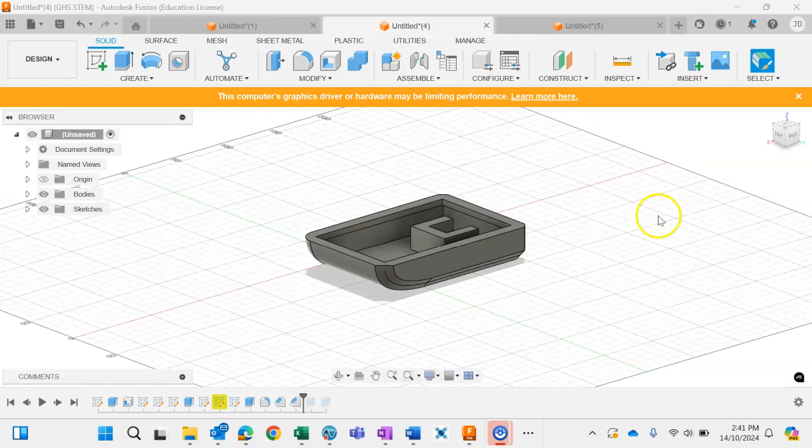Hi, in this video I'm going to show you how to create a simple flat bottom boat, kind of like what you can see up here on the screen at the moment. If you haven't already watched my video on how to create a pontoon boat, you might like to go back and view that for some other design principles I'll probably skip over here. I'm going to create a new design. Like with the pontoon boat, we're looking to create a two-dimensional cross-section of the boat, then use a process called extruding to turn that into a 3D shape.

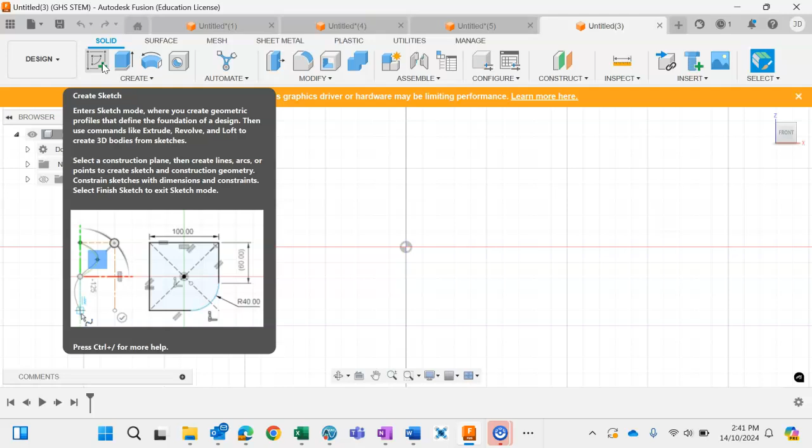So I'm going to go to the front view. Now I'm looking at the red line there, the x-axis, that's like our print bed. The z-axis gives the depth or the height of the object. Like I always do when creating a new sketch or product, we need to create a new sketch, and then create a two-dimensional representation of what we want to build.

You might have just missed that step, I just skipped over it. I clicked on that square there, so I've told Fusion 360 that I'm working in this plane.

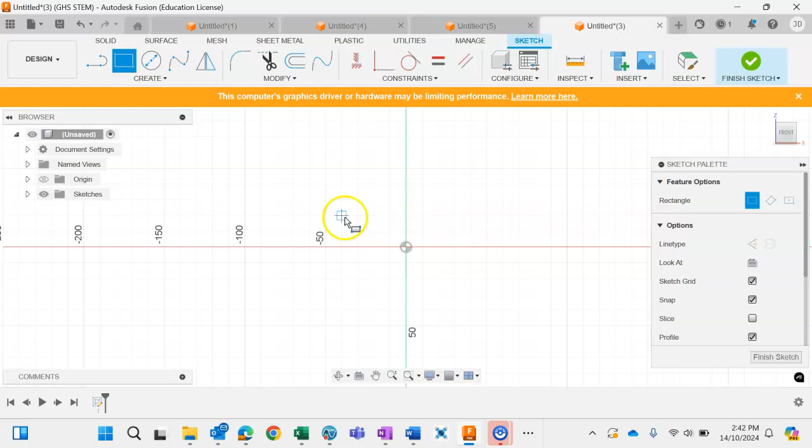Now I'm just going to create a big rectangle basically. Remember the dimensions of the boat are 150 millimeters by 100 millimeters, so I'm going to stick to those measurements. Of course, you could make it smaller if you wanted to - that's the maximum. How deep you want your boat to be is up to you, but I'm going with a height or depth of 30 mil.

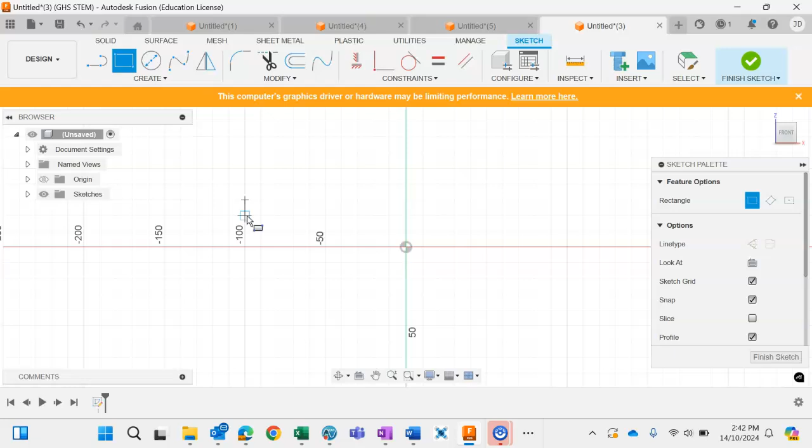I'm just going to click in that top corner there, and then drag out my rectangle, taking it into the middle so that's 100 millimeters. Because when I add on the next bit, that's going to make it 150 mil. So the next thing I want to do is create a curved line.

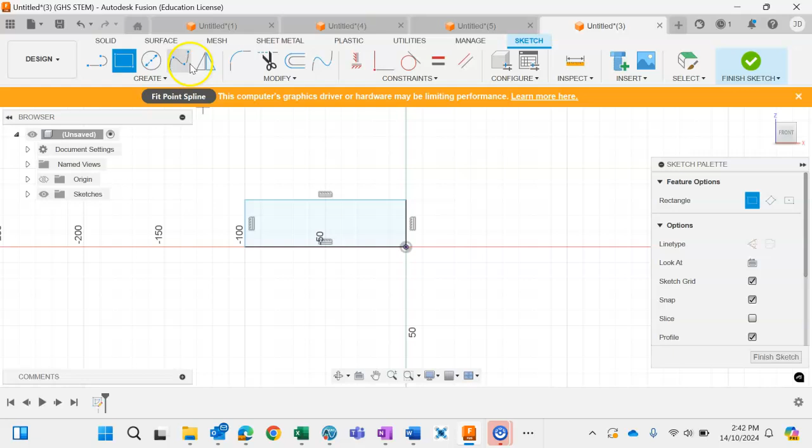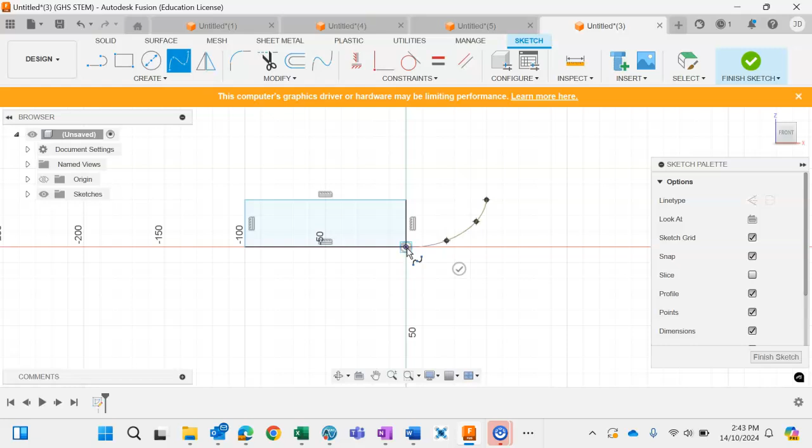I use this function up the top here, it's called fit point spline. I'm going to grab that and take it out to 150 millimeters from the back of the boat. With this tool I can click a few points, and then press enter once I've clicked on my last point. And then I've got a nice curved line.

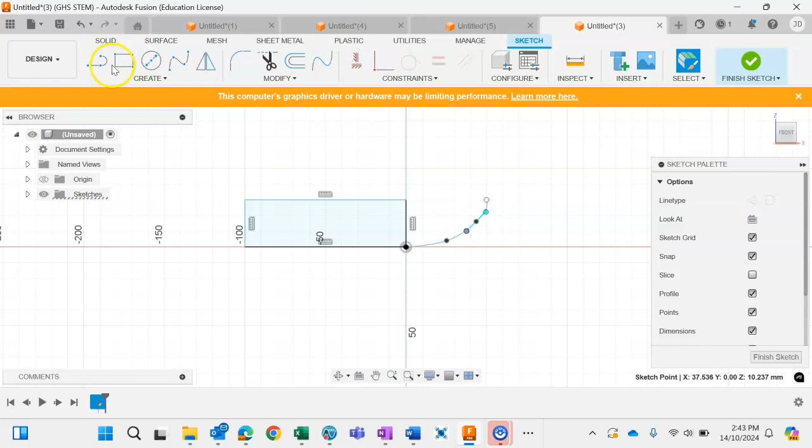Now these green dots we can use to drag the shape around to create different angles, so you can use those to adjust the pitch of the front of your boat. Then I'm going to join the rectangle up with that curved part, so now I've got a total length of 150 millimeters, and a two-dimensional representation of what my boat's going to look like - a cross-section of it.

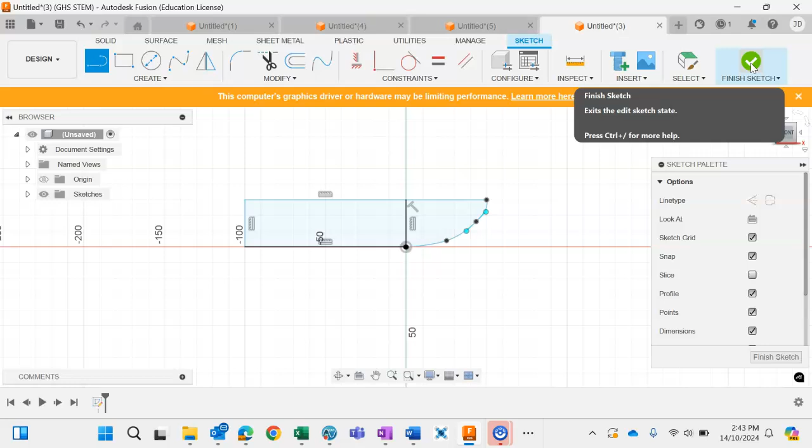Now I'm just going to click Finish Sketch because I'm done working in 2 dimensions. I want to turn it into a 3-dimensional object. So I finish my sketch, and then go to the home view, so I'm looking at it in 3D.

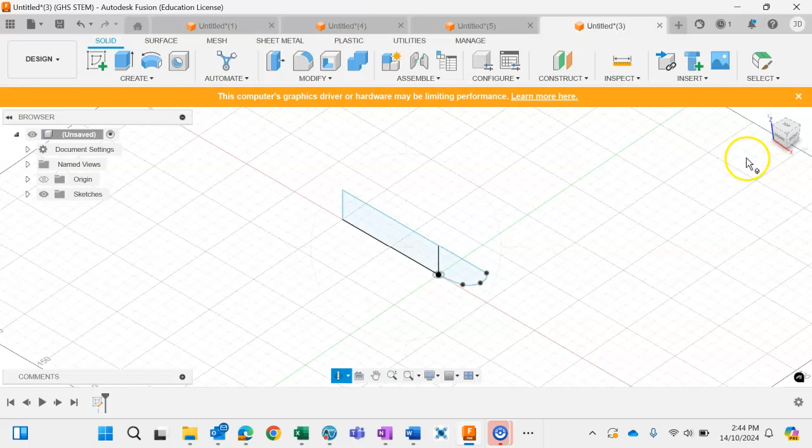Now I'm using a mouse, which makes it really easy. I'm using the scrolling wheel to zoom in and out of that design space. If I click on the scrolling wheel, that allows me to pan - you can also pan by clicking on that pan option down the bottom if you're using a trackpad. If you want to orbit, to look at it from different angles, you can choose that orbit option, or use the orientation cube to orbit around or change viewing angles.

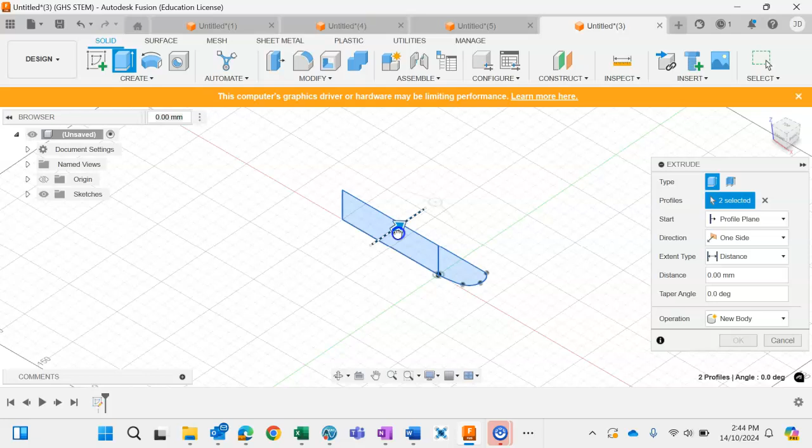Once I'm done with the orbit, I'm going to click escape, which gives me my pointer back. I'm going to use my window selection to highlight the shape I've created so far, and then choose the option of extruding it. Now I can just drag that over, or type in 100 mil because that's the width of our boat. Just enter, and there you go - you can see straight away I've got a really simple flat bottom boat there.

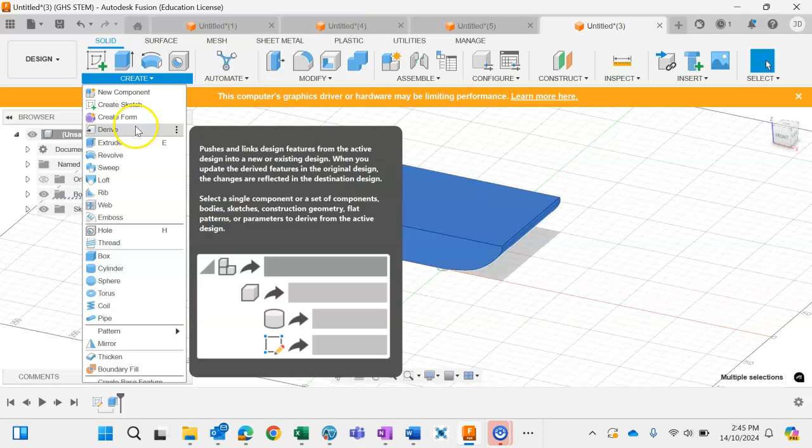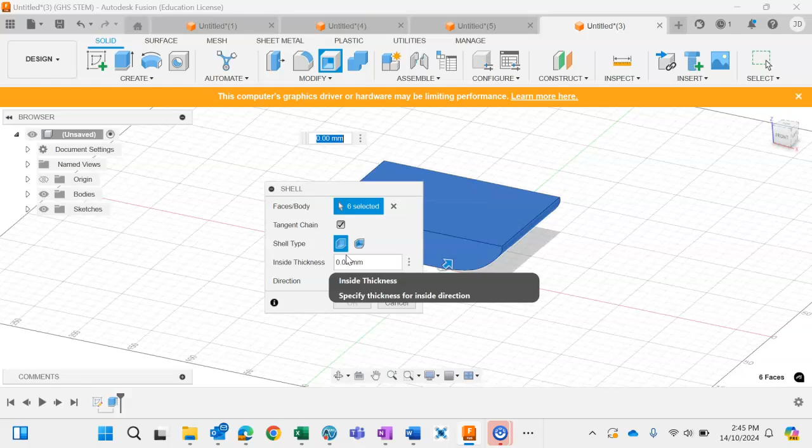Now you might have noticed in the other design I created, it was an empty hull, so it didn't have a top to it. The way we do that is if I highlight my object again, then go to the create menu... sorry, in the modify option, I'm looking for the shell. When I click on that, I create a shell and decide what thickness I want. I'm just going to give the shell a thickness of 3 millimeters.

Okay, and then I'm just going to click OK. Now it looks like nothing has happened at this point, but what it's done is it's created the inside of this object as basically empty. So I've just got a shell there, nothing on the inside of it.

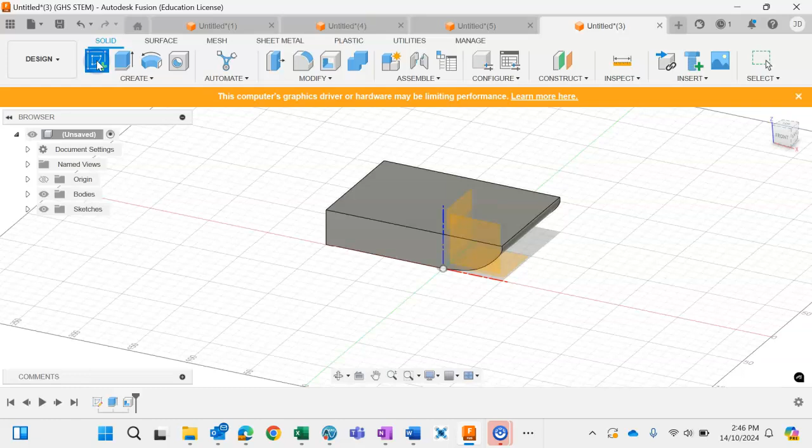So what I'm going to do now is remove some of the top so that I can see inside my boat. I'm going to click on create a new sketch, and click on the top surface, so now I'm looking down on my boat. And what I'm going to do is create a rectangle on top of the boat.

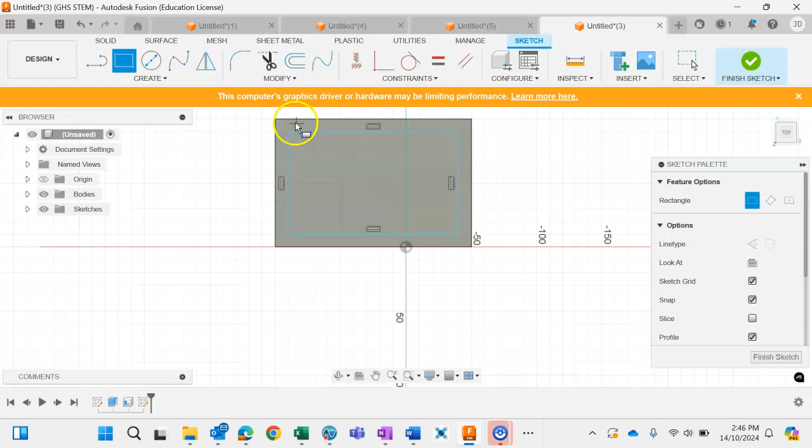I've made my rectangle so it's got a pretty big width of 10 mil. Now if I go to finish sketch, I'm going to click on that face, and now I'm going to extrude. I'm going to give it a negative extrusion of 5 millimeters - I think 3 would do the trick, but I'll go with 5. Sorry, I need to go -5 because I'm going downwards.

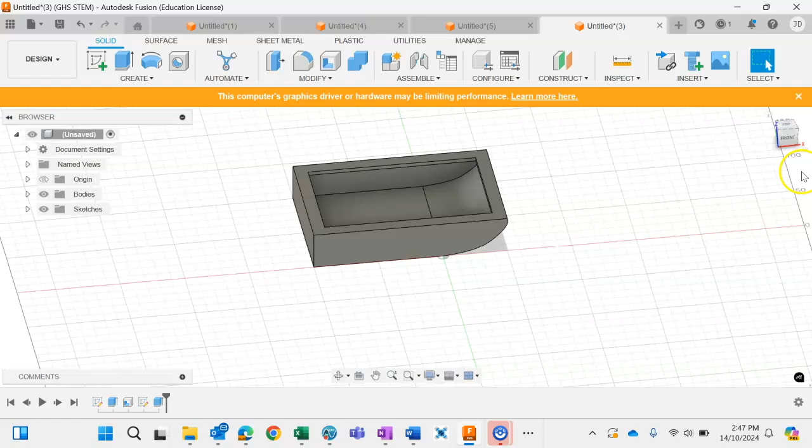Okay, you can see once I've done that, I can now see inside my boat, an empty shell. So then if you wanted to, you could go ahead and mount your motor in there, or set up a place to put your sail, or whatever it is you're using as your mode of propulsion. Now if you're using an electric motor, for example, you'd need a hole at the back of your boat for the prop shaft to go through.

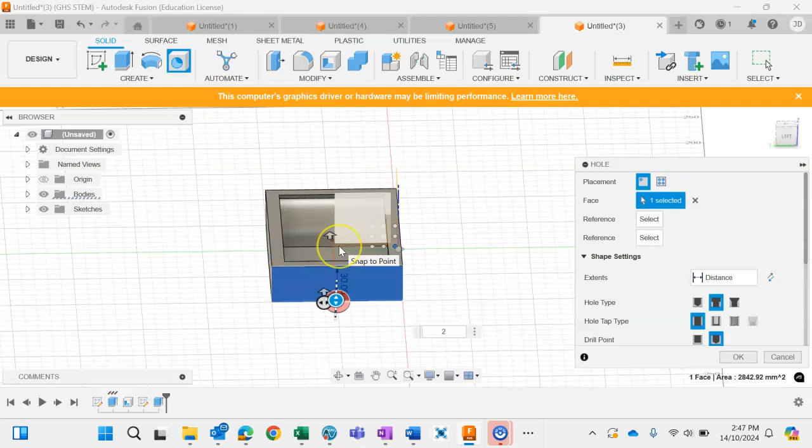Now this is something we can always do with a drill later on, but I messed that up, I didn't want to do that. So I'm just going to go back. I don't actually want to use that hole. Sometimes it's easier, I think, with a hole just to use a circle.

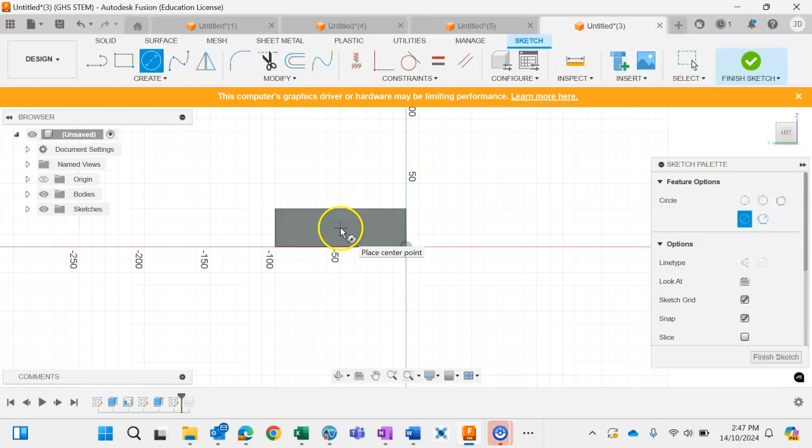So I've just clicked to start a new sketch, just going to create a circle. I'm going to put it around about there, and I might make it like 3 millimeters. Might be enough, maybe 5. 5 might do the trick. Okay, and then I'm just going to finish that sketch.

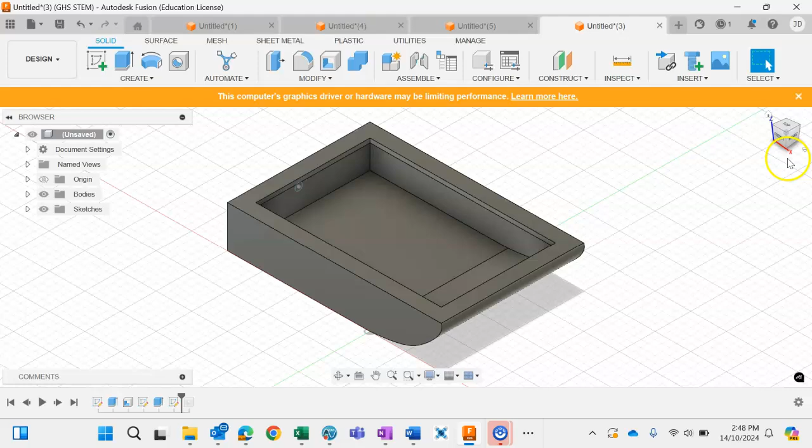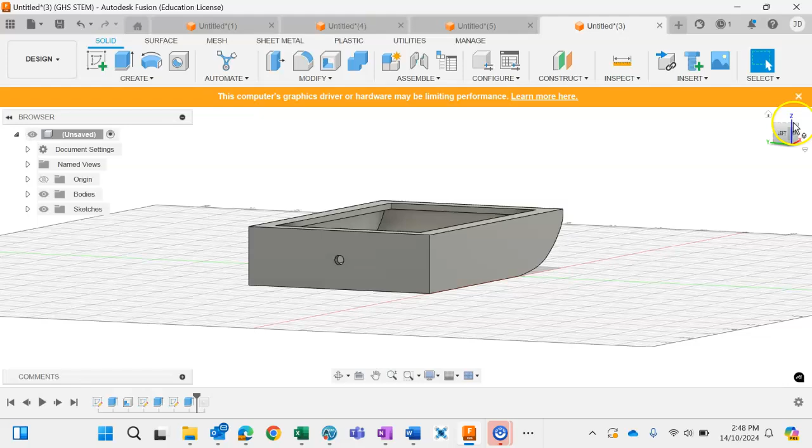And if I go back to that view and scroll around so I can see that hole, I'm going to click on that circle, and then extrude it. Click on that again, so I'm just going to go -3, and that will make sure the hole goes all the way through. That's somewhere you could put the prop shaft through, from your electric motor through to the propeller. Then it's sort of like we did with the pontoon boat.

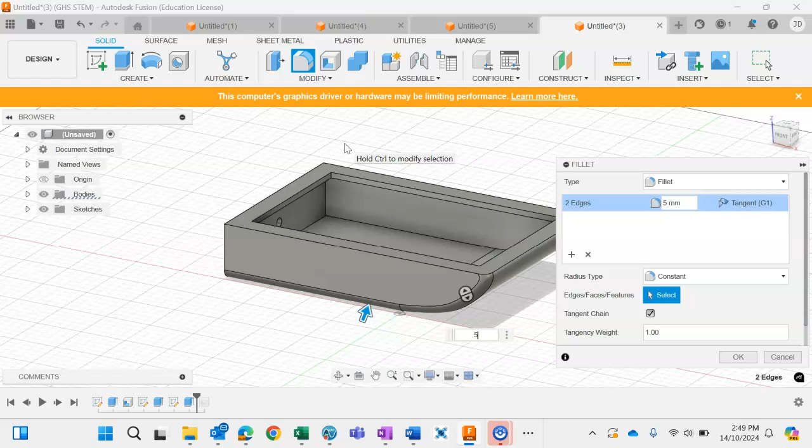You can then use fillets and chamfers to make the shape a little bit neater. So I'm just going to click on that edge, for example, and control click on that second edge, and then choose from my modify option whether I want to fillet or chamfer. I'm going to show you the fillet first, and I might make that 3 mil, maybe 5. And then you can see we've got a nice rounded edge on that side.

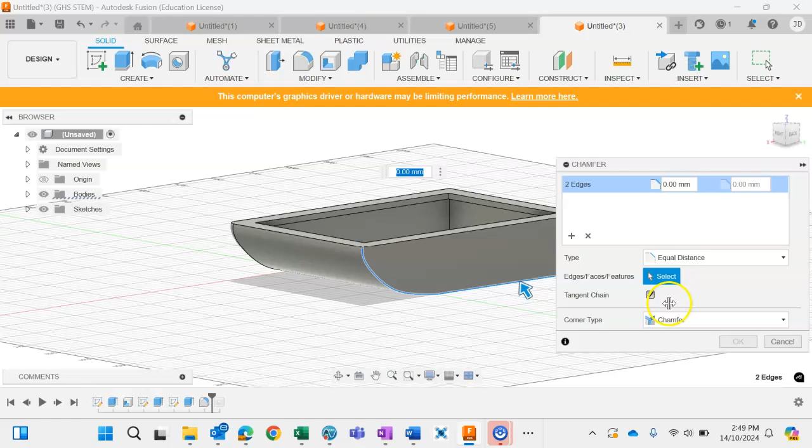Just to show you the difference, I'll go over to the other side and do a chamfer. So I've clicked on that and control clicked the other edge, then we'll go for a chamfer. I might try and make that 5 mil as well. Press OK. And then you can see I've got a nice 45-degree angle on that side. So you can decide for yourself what type of finish you'd like - you might even just leave it square, and that's fine as well, but there are some other options for you.

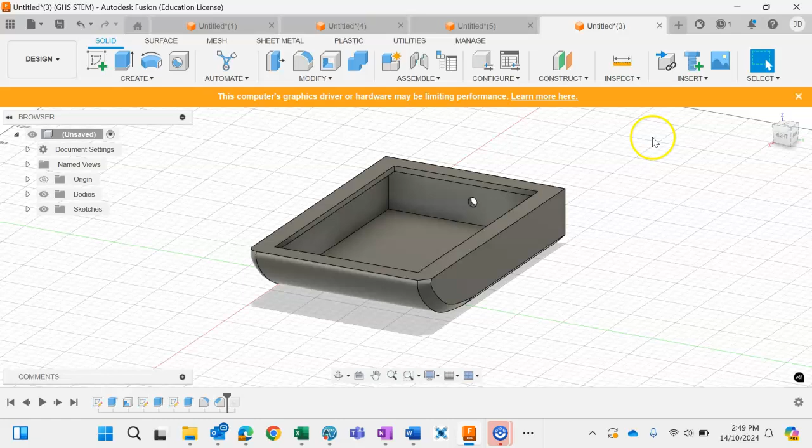Hopefully this helps you along a little bit. Now, like I've said with our other designs, if you can add your name somewhere onto your boat, that would make things a little bit easier once we print them off. So you can just do that by clicking on a new sketch, click on that plane face there, and then we can choose the option of text.

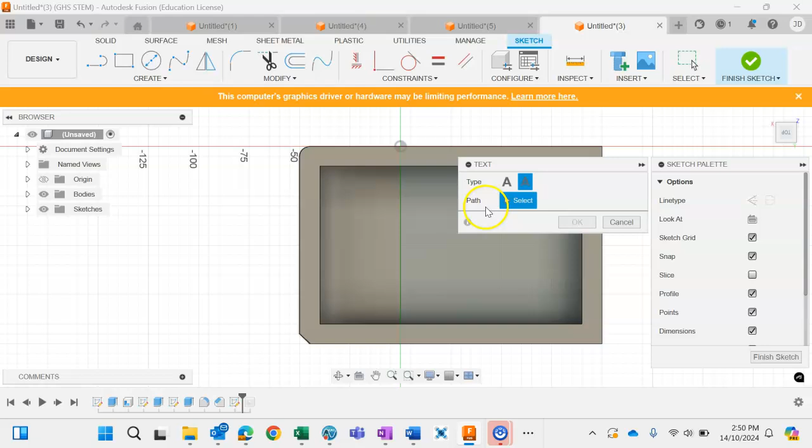I'm just going to click there - wait, I just want that one. Click in here, and then I can just write my name in there like so. Finish sketch. Now you just need to extrude it.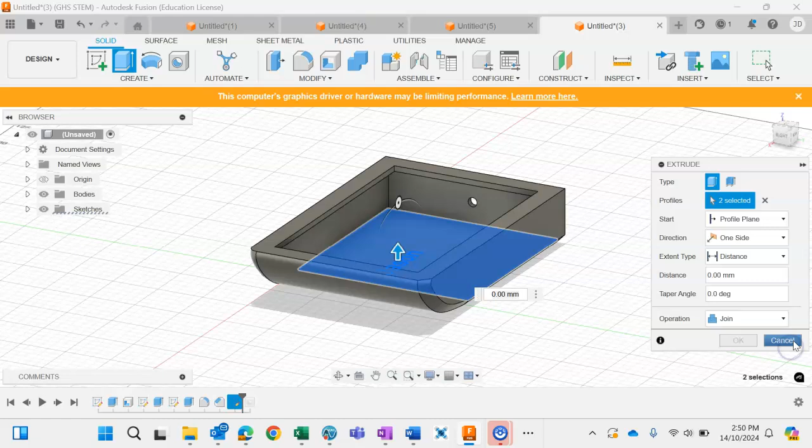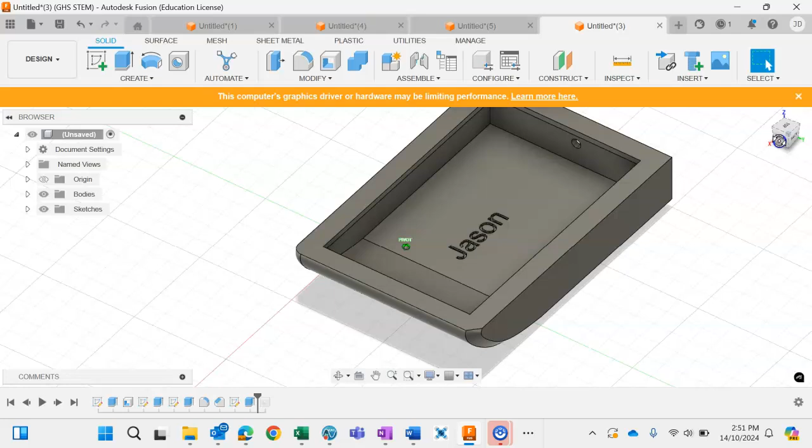That's extruding the wrong thing, so I'm just going to cancel that. Zoom in, click on my name, and then choose extrude, and I'm just going to extrude at -1 mil so it just embeds in the bottom of the boat there. That way, once I print it off, it'll be nice and clear as to which design is mine. So if you can do that, that'd be great.

And then that's another design that you can play with and try some different forms of propulsion with. Hopefully you found this video useful. Thanks for watching, I'll see you in the next one.